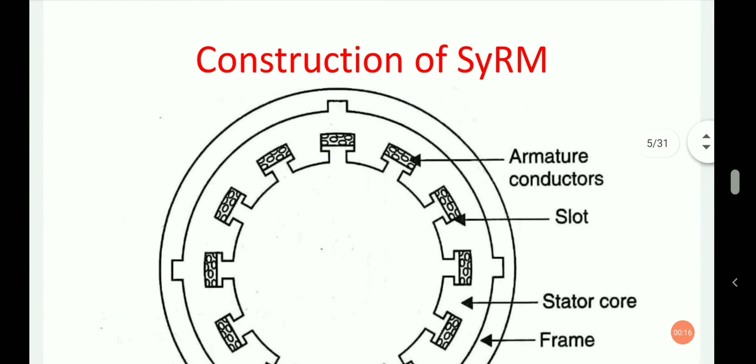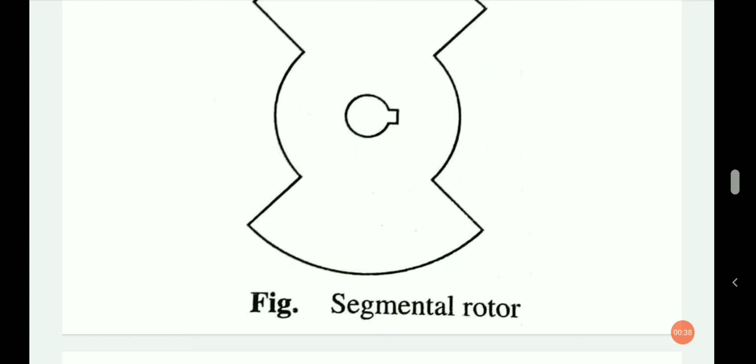In the previous video, we have seen the synchronous reluctance motor. We discussed the construction of the synchronous reluctance motor. In that, we have seen constructional details of the stator as well as constructional details of the rotor of the synchronous reluctance motor: segmental rotor type, axially laminated rotor and radially laminated rotor.

In that video, we have not seen one type of rotor construction, so in this video we will continue that one. Another type of rotor construction, which is also a radially laminated type, is shown in the figure. You can see in addition to flux barriers, the rotor laminations have slots on their outer periphery.

The laminations are assembled to the required length and then put into an aluminum bath at high pressure. The aluminum fills in the slots and spaces provided for flux barriers. The rotor has a cast aluminum starting cage similar to the cage winding of an induction motor. The synchronous reluctance motor with this type of rotor is self-starting.

In another type of rotor construction, here the line start synchronous reluctance motor rotor, you can see it is also a radially laminated type rotor construction. In addition to flux barriers, rotor laminations have slots on the outer periphery. Here you can see slots on their outer periphery.

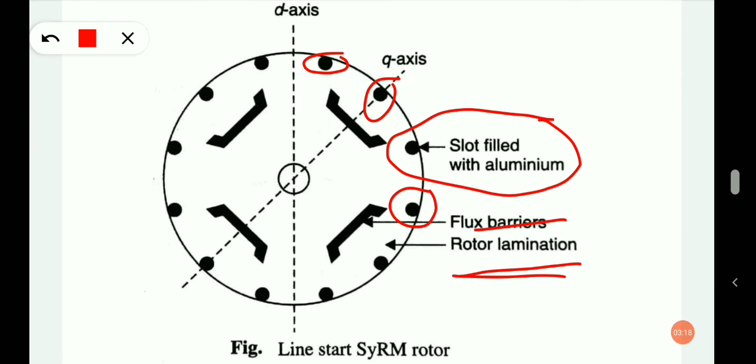The laminations are assembled to the required length and then put into an aluminum bath at high pressure. And this type of air flux barriers you can see and rotor laminations. This type of rotor is self-starting.

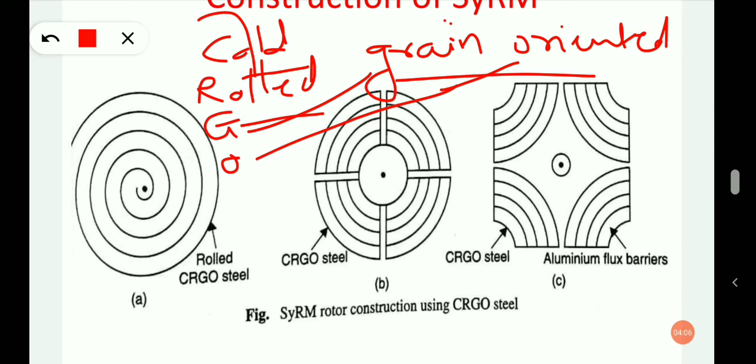Next, in another type of rotor construction, cold rolled grain oriented steel is used. Here CRGO: C for cold, R for rolled, G for grain, and O for oriented. Cold rolled grain oriented, that is CRGO. So in this type of rotor construction, cold rolled grain oriented, that is CRGO steel, is used.

The core is first made by rolling CRGO steel. This core is then cut into 4 pieces. Here you can see this is rolled CRGO steel, and this core is then cut into 4 pieces. In figure B, you can see there are 4 pieces: 1, 2, 3, and 4.

These four pieces are then inverted to get the shape as shown in figure C. Inverted means the inner section is the outer part in figure C, and the outer part is the inner part. So four pieces are inverted to get the shape shown in this figure.

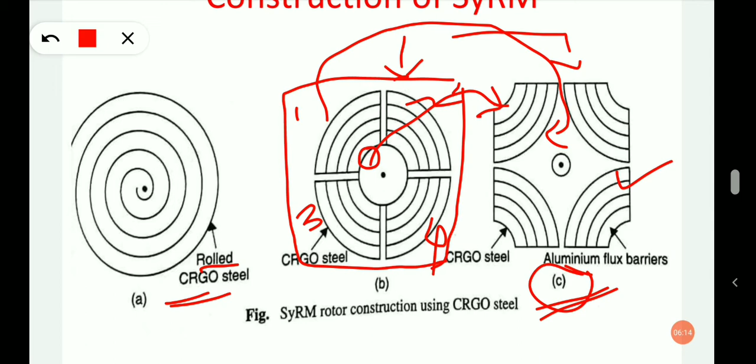CRGO has high permeability in the direction of rolling, so the flux is provided with a high permeability path along the D axis, that is direct axis, and a low permeability path along the Q axis, that is quadrature axis. In this construction, the difference between the direct axis synchronous inductance and the quadrature axis synchronous inductance is larger, and higher torque is developed compared with other types of rotors.

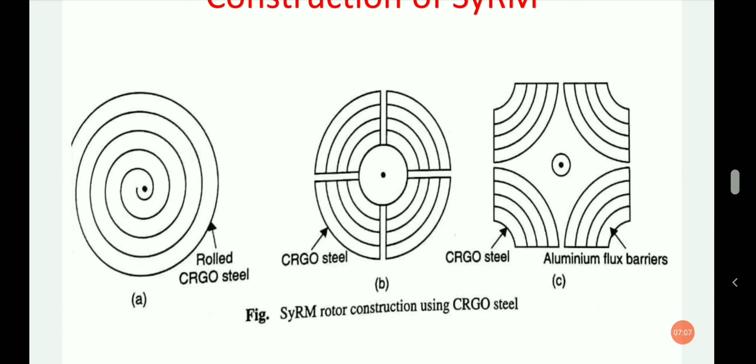This is about rotor construction of the synchronous reluctance motor. This part was not covered in the last video. Now the next point is working of the synchronous reluctance motor.

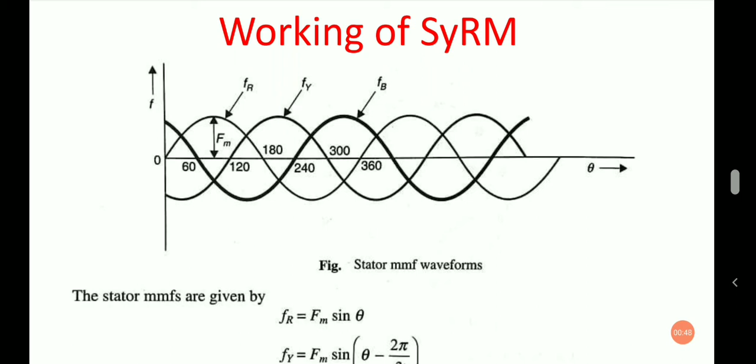Here you can see three waveforms for three phases: FR, FY and FB. So magnetic fields for three phases.

And these three waveforms are displaced by 120 degree. You can see for the first two waveforms here the displacement is 120 degree, and after that, for the next waveform it is the same. So we can see for each waveform it is 120 degree.

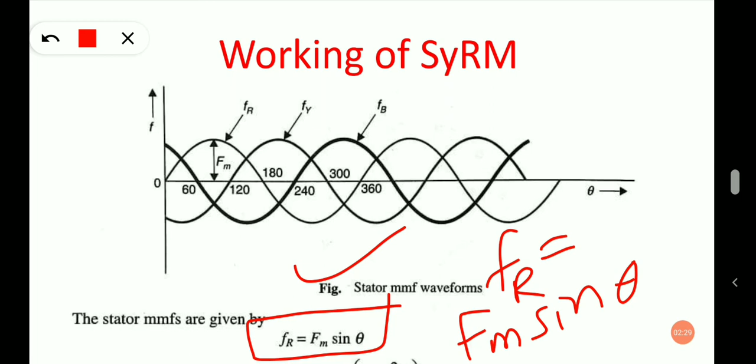The stator MMF waveforms are shown in the figure, and this stator MMF is given by FR equals Fm sin theta. Okay, FR equals Fm sin theta,

and for FY we can write Fm sin, instead of theta it will be theta minus 2 pi by 3. Okay, so here theta minus 2 pi by 3 is written. So minus 2 pi by 3 is nothing but minus 120 degree, because the waveforms are displaced by 120 degree.

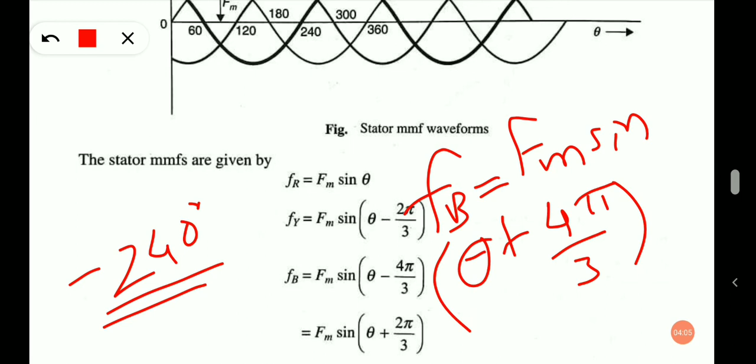And for B phase we can write FB is equal to Fm sin theta minus 4 pi by 3. So it is nothing but minus 240 degree. Why? Because for R and B phase the difference is minus 240 degree, or we can write theta plus 2 pi by 3.

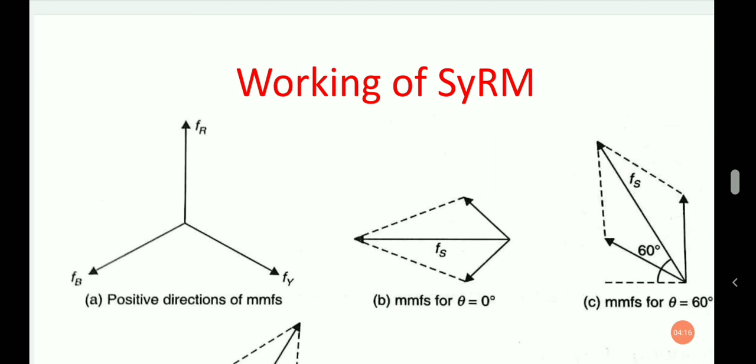Assume the positive directions of MMF as shown in figure A. So here figure A is given for the positive direction of MMF. Consider the MMF at theta equals 0. The phase MMF and resultant MMF are shown in figure B.

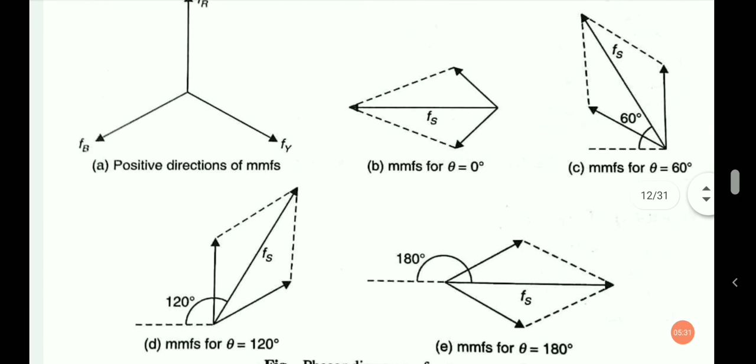At theta equals 60 degree, theta equals 120 degree, and theta equals 180 degree, the phasor diagrams are as shown in figures C, D and E. So in figure B and figure E, the phase MMFs have equal magnitude of root 3 by 2 Fm, and their resultant MMF is 1.5 Fm for figure B and figure E.

It can also be observed from these figures that the resultant MMF is rotating. When the MMF wave completes 180 degree, the resultant MMF moves by 180 degree in space. The three-phase MMF produces a resultant MMF of magnitude 1.5 Fm, which rotates in space at constant speed.

If the supply frequency is F and the winding is done for P poles, the rotating field has a speed of 2F upon P RPS, okay, rotations per second. This speed is also called the synchronous speed.

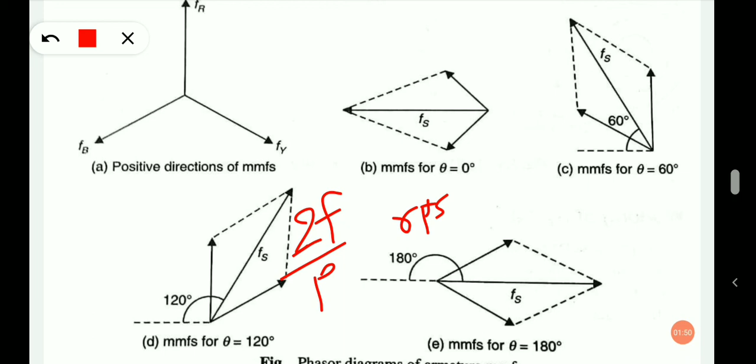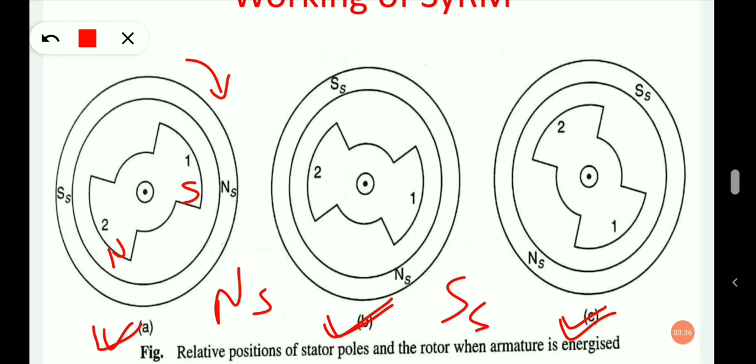The rotor rotates by 60° when the revolving field completes 60° as shown in figure B. At this instant also magnet poles are induced on the rotor and a magnetic attractive force makes the rotor move in the same direction, that is clockwise. And figure C shows another situation. The rotor moves together with the rotating magnetic field at the same speed in the same direction.

The revolving magnetic field exerts reluctance torque on the rotor to align its projecting pole axis with the revolving magnetic field axis to have minimum reluctance. If the reluctance torque is sufficient to start the motor plus load, the rotor will run in step with the rotating magnetic field.

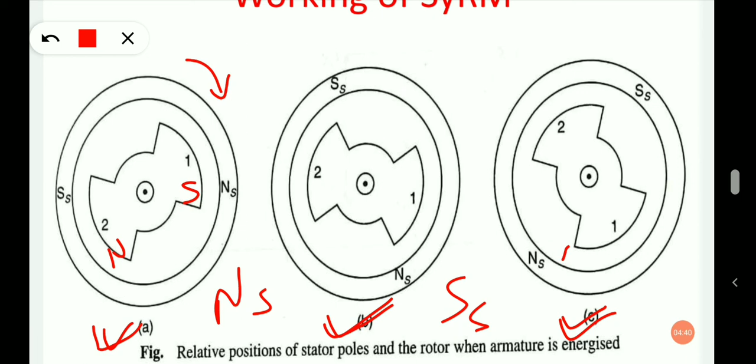The synchronous reluctance motor starts as an induction motor and the reluctance torque pulls the rotor into synchronism with the stator field. This is all about the working of the synchronous reluctance motor. In the next video, we will see the phasor diagram and torque equation of the synchronous reluctance motor.